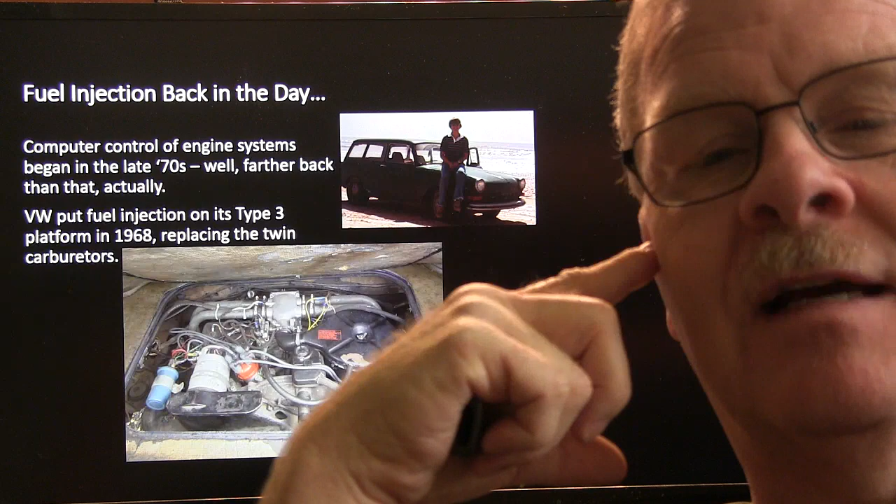This was a car I owned back in the late 70s, a little Type 3 Volkswagen Squareback. You might have seen those - they also had a fastback version. The Type 1 was the Bug, the Type 2 was the Bus, and the Type 3 was this one.

Then they had the Type 4, which was the 411 and 412. Those were interesting cars because they had a gasoline heater you could turn on before even starting the car, and it would run on a timer for about 45 minutes using gas from the tank to heat the inside of the car.

One way or another, fuel injection first came out on these cars in 1968. Prior to that, they had two carburetors on them.

I used to watch my dad work on these cars at his VW shop. He would adjust both carburetors at the same time using thumb wheels while listening to them. He'd take a piece of foil hose, like what goes from the stove up to the air cleaner on older trucks - it had a thermostatic air cleaner - and he'd listen, because Volkswagen used that airflow from the blower housing down through the heat exchangers for the heater and all.

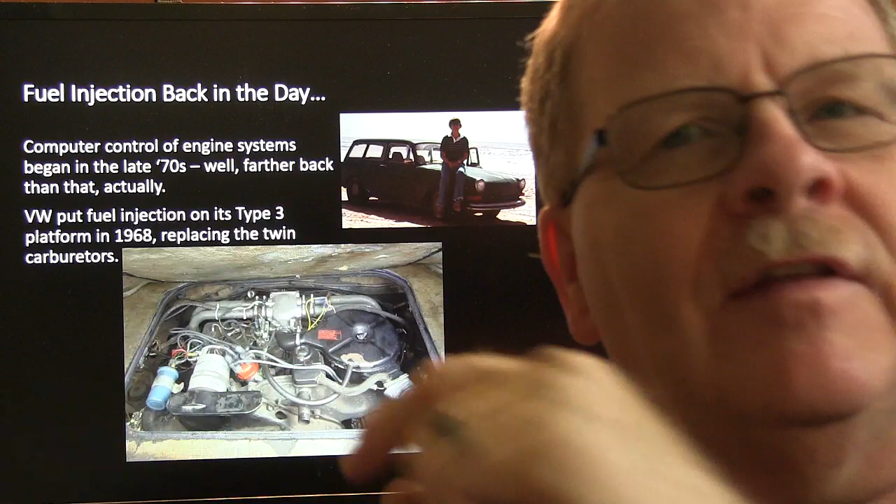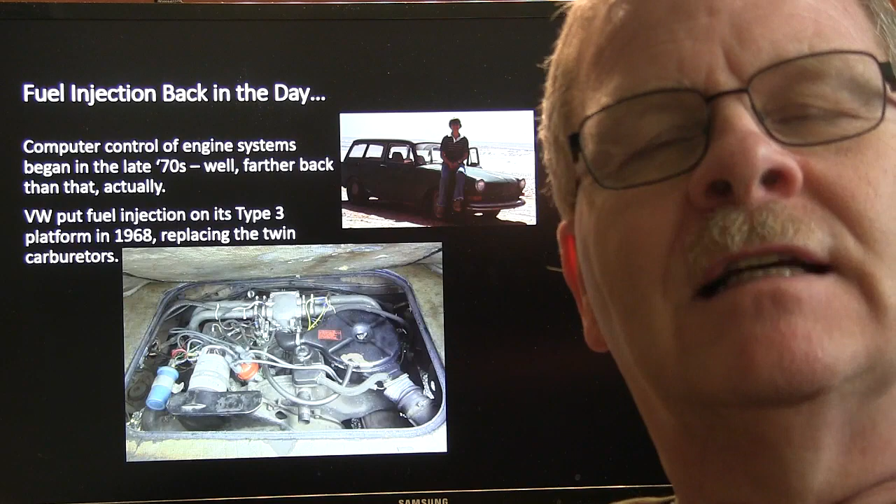He'd listen to one carburetor and then the other. I never really knew what he was listening for, but he'd fool with them until they sounded the way he wanted, and they'd run really smooth. Well, this fuel injection that Volkswagen popped on these things in 1968 was a different critter.

Incidentally, in the schools they used to say that these old engine controllers Bosch was using to start with - you could buy any part you needed to fix that engine controller from Radio Shack at the time. Everything in it was available from Radio Shack. I don't know how true that was, but that's what they always said.

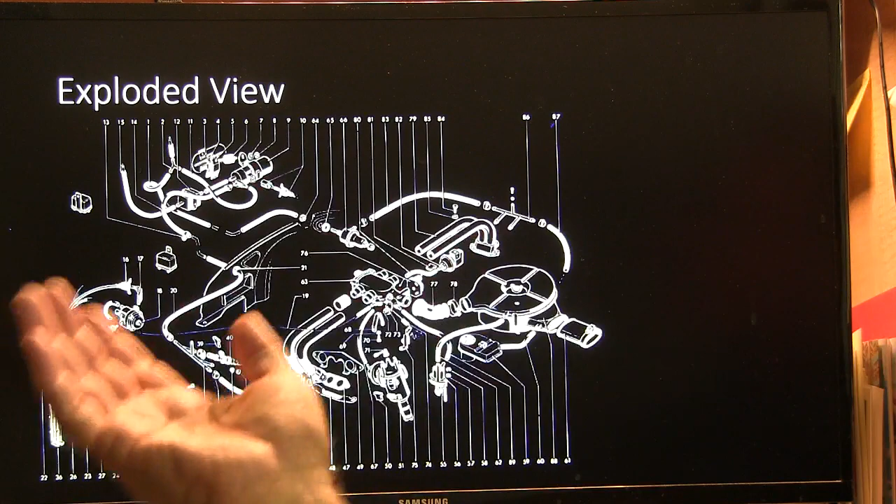And basically, you had this. This gives you - if you're familiar with Volkswagen air-cooled engines, you'll be familiar with this because of the way it was set up. It comes in, it's dual port heads and all that, and so on and so forth. I don't need to look at that slide anymore.

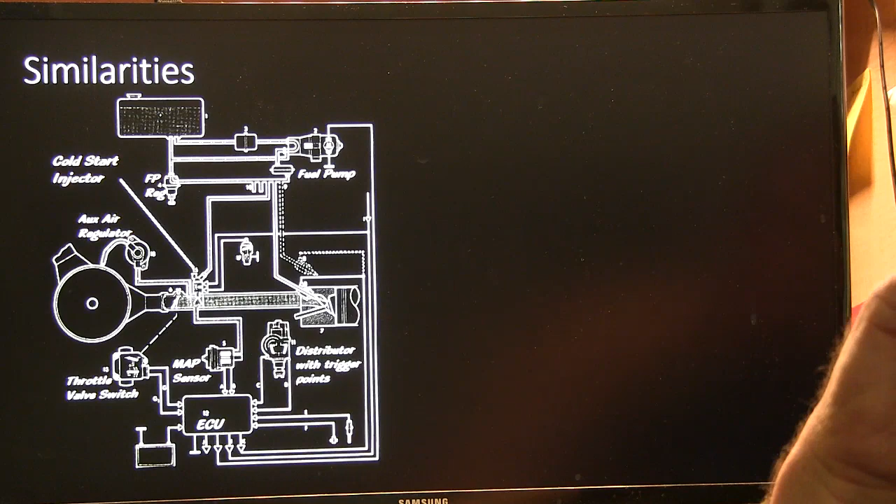The similarities between this and the stuff you've got now are pretty interesting. You've got an auxiliary air regulator - think idle air control valve. You'll notice that's pulling filtered air and putting it right in behind the throttle plate, right? That enables the auxiliary air regulator. When you first started it, it had a little bimetal strip in it, and that bimetal strip would get power when you first started it.

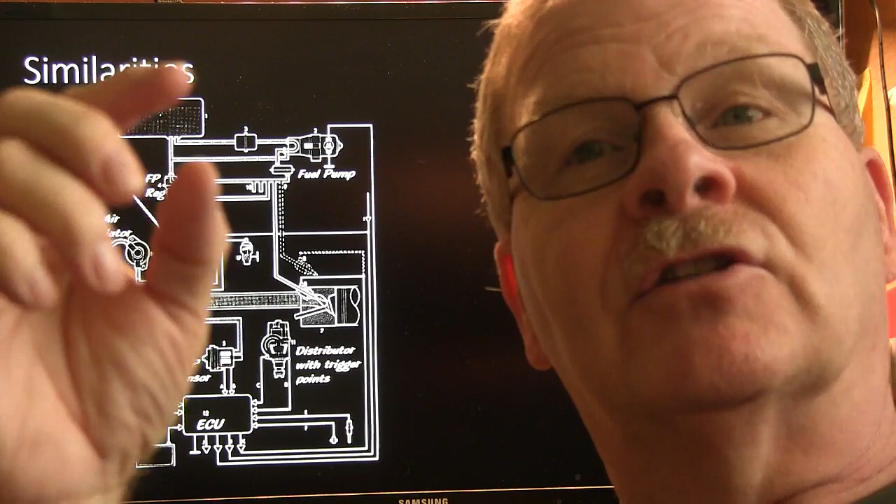And the bimetal strip, to start with, was letting air go through that auxiliary air regulator, but as that bimetal strip warmed up with its calibrated heat, it would close off a little pintle and stop that air. So it gave you your fast idle, right?

Okay, so then basically you got your fuel pressure regulator right here, and you got your fuel filter, and you got your fuel pump. As I remember, that was an adjustable fuel pressure regulator. And then you got a cold start injector.

You remember I've talked a few times on these videos about how for your cold starts you need to double pulse the injectors, or you have to have a cold start injector that'll put extra fuel in there to wet the manifold, because on a fuel injected engine you don't have an accelerator pump like you do on a carburetor.

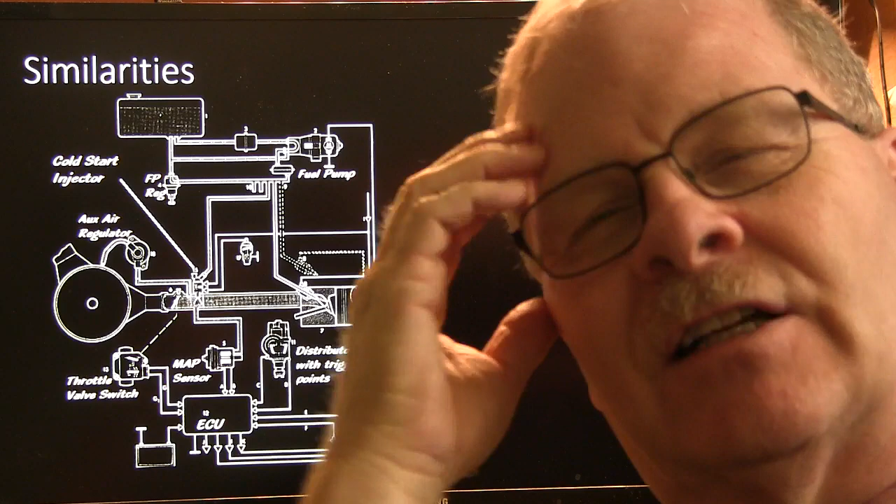There's your ECU. The trigger points on that would basically give the ECU what it needed for engine speed, so that it could click, click, click, click the injector. You could hear these injectors clicking. They were pretty loud when these things were running.

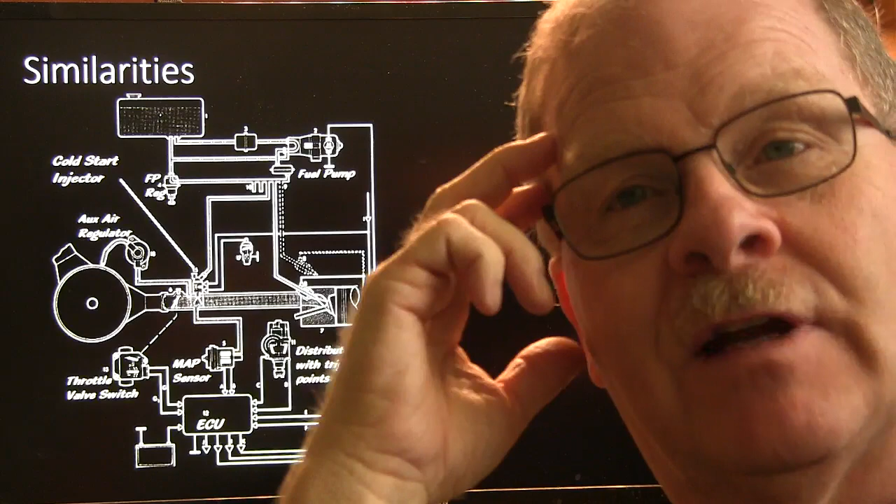And there was 40 pounds of fuel pressure, and those hoses that they used to feed the fuel pressure to the injectors were those old cloth-covered rubber hoses like the Germans like to use on the older Volkswagens. It's real interesting. And those things had a tendency, whenever they got some miles on them and got old, to start busting, spraying fuel everywhere, or start leaking.

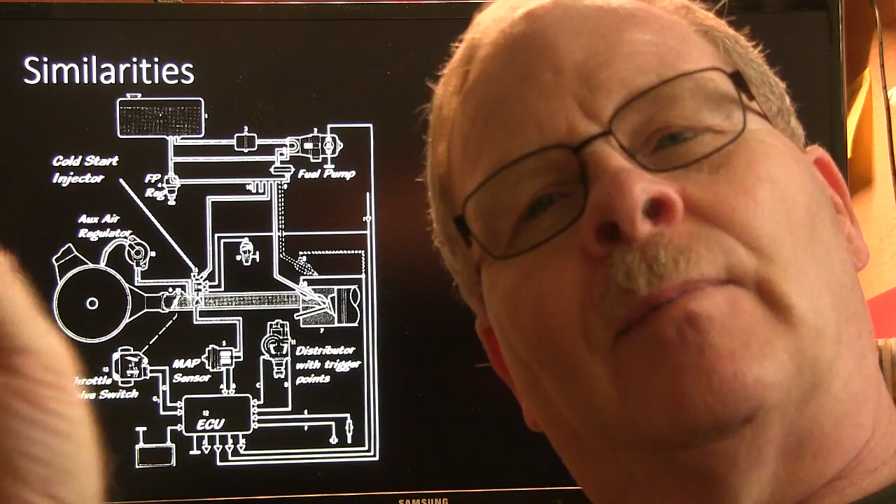But anyway, the temperature sensor and the throttle switch and all that, and your MAP sensor basically is what this was. They called it something else, but that's basically what it was. It was a MAP sensor, an input to the computer along with this, and what it would do is it knew how to expand the pulse width just the right amount based on the engine load.

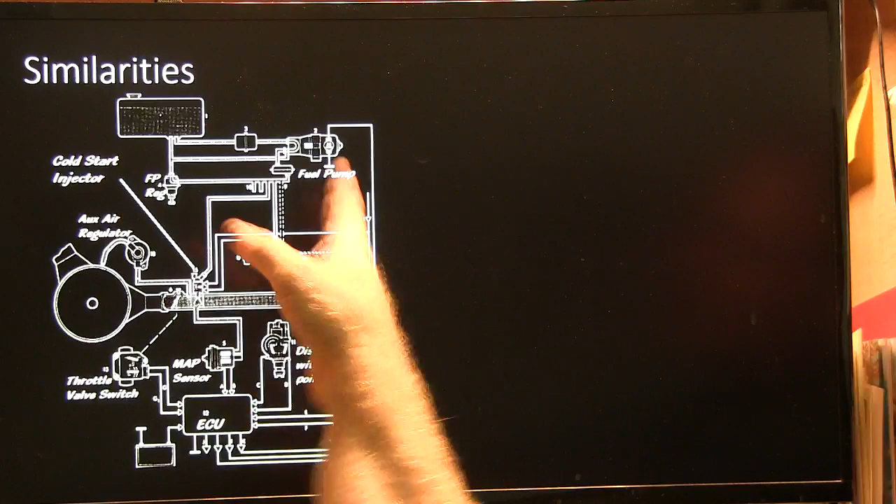And it was a sort of a funky thing that they did. Didn't have any feedback at all. You basically just had to have the fuel pressure right, and this thing had to be operating correctly, so it was giving the right information about manifold vacuum and that. And that was pretty much their answer to fuel injection. It came out there early.

All right, so change in electronics, the rise of the Vane airflow sensor. The Vane airflow sensor was basically a little air box that had a flapper in it. Whenever the air would come through that flapper would move, and it was connected to a set of points that would slide on this potentiometer.

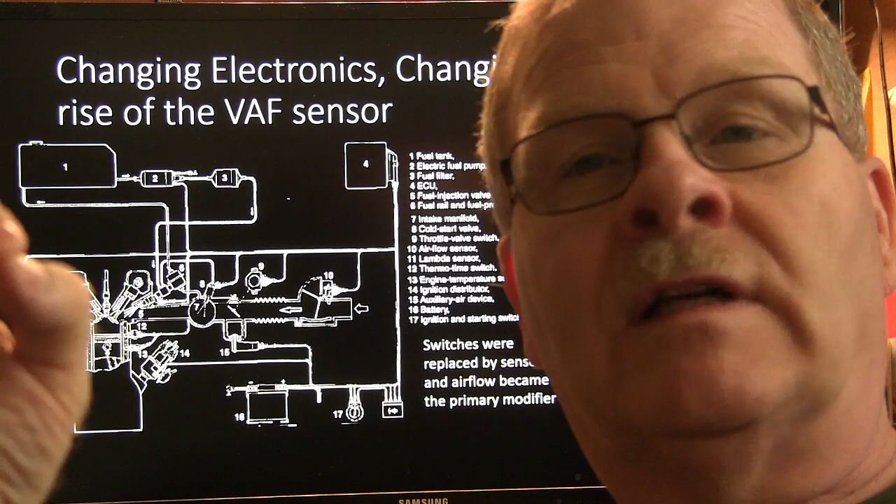And there was also a little set of points in most of these Vane airflow meters that until that Vane airflow meter started to move, the fuel pump wouldn't get any power at all. When you started spinning it over, that Vane airflow meter had a real weak spring holding that flapper, but it would start to move a little bit, and it would close some points that would operate the fuel pump.

If you ever unplug a Vane airflow meter that's set up that way, and you want to start the car with the Vane airflow meter disconnected, you got to jumper the little terminals that are going to the fuel pump. It basically goes through the Vane airflow meter. You got to jumper those so the fuel pump will run, so you can fire it up without the Vane airflow meter connected. If you disconnect it, you won't get any power to the pump.

And these things right here, some of your really early Ford Escort fuel injected engines, like in '83, they had a Vane airflow system. Volkswagens like to use that. Toyota used it all the way up into the '80s, like their MR2 and stuff like that.

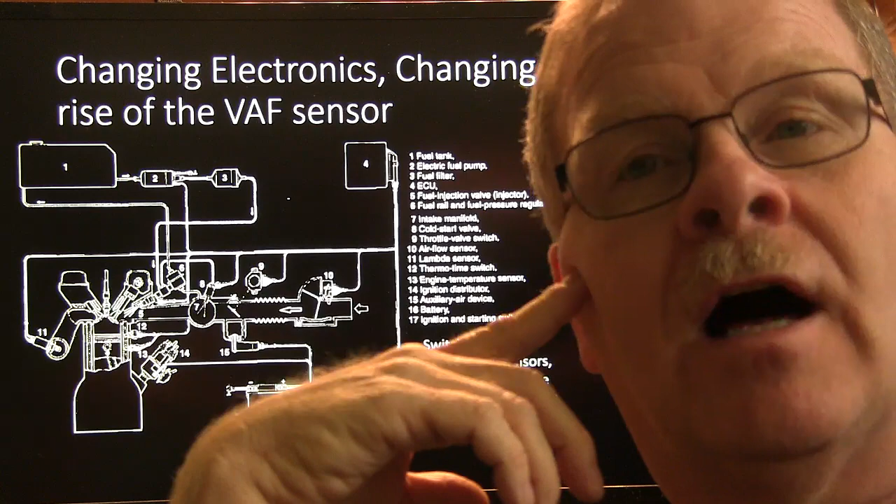I priced a Vane airflow meter one time for an MR2 when I was thinking, according to the readings I was getting from that MR2, going by Toyota's book, it looked like the Vane airflow sensor was a problem. But whenever I priced it out and found out it was $800, I decided I needed to look somewhere else before I went and ordered that darn thing. And I found the problem somewhere else, but that's another story.

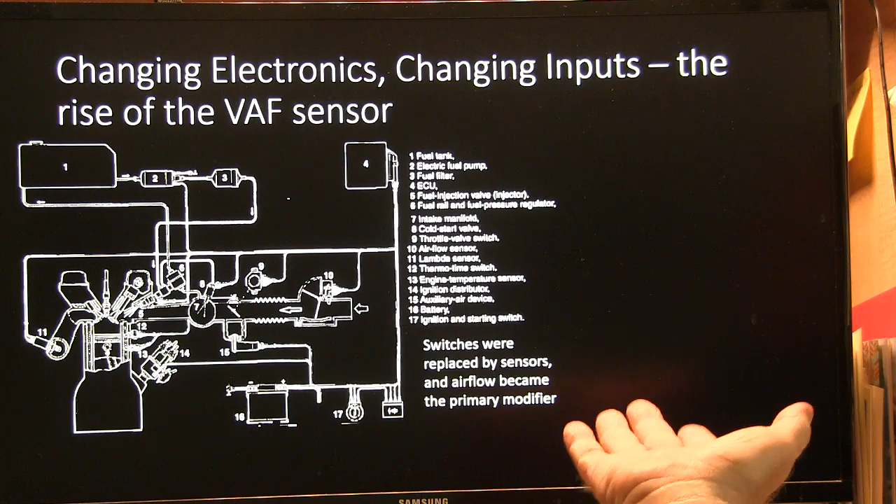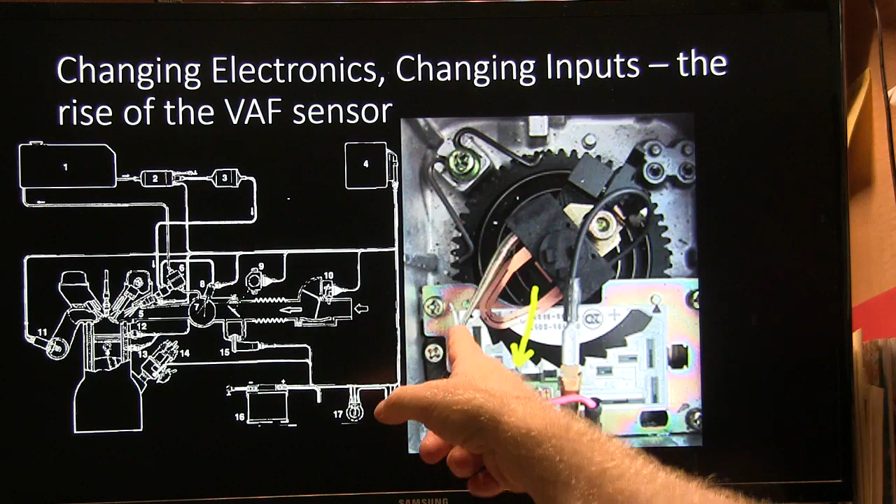This one had a scorched spot, but in spite of that, I made the car run right without replacing it. One way or another, that little set of points is what gives you your fuel pump whenever that flapper starts to move.

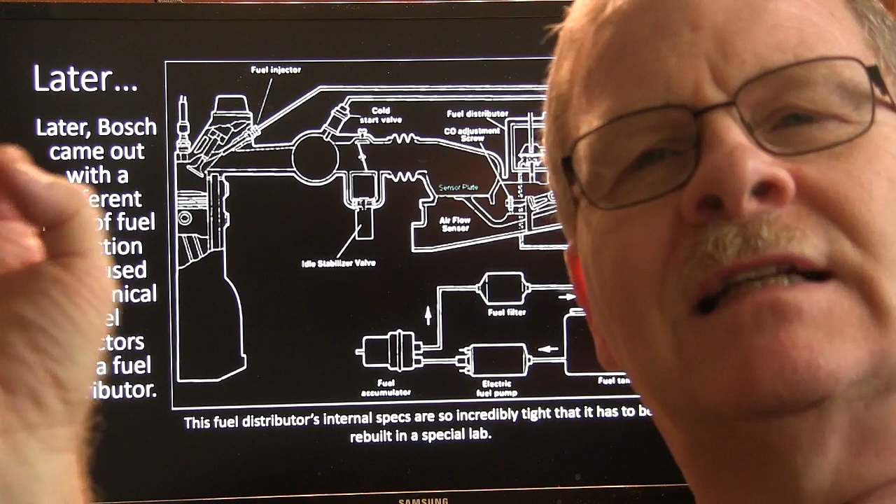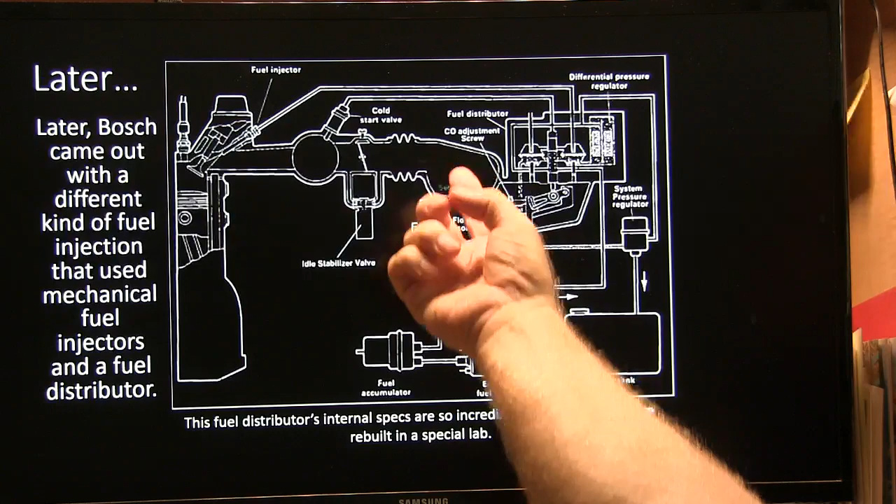Later, Bosch came out with a different kind of fuel injection that some of you are probably familiar with—the same kind used on the DeLorean. If you've ever worked on a DeLorean, you've seen Bosch K-Jetronic fuel injection. They also used it on Volkswagen Rabbits for years. They had these little atomizers with fat O-rings that you'd snap into place, spraying behind the intake valve. As airflow came in, it would push against a plate, raising it, which in turn raised up the fuel distributor.

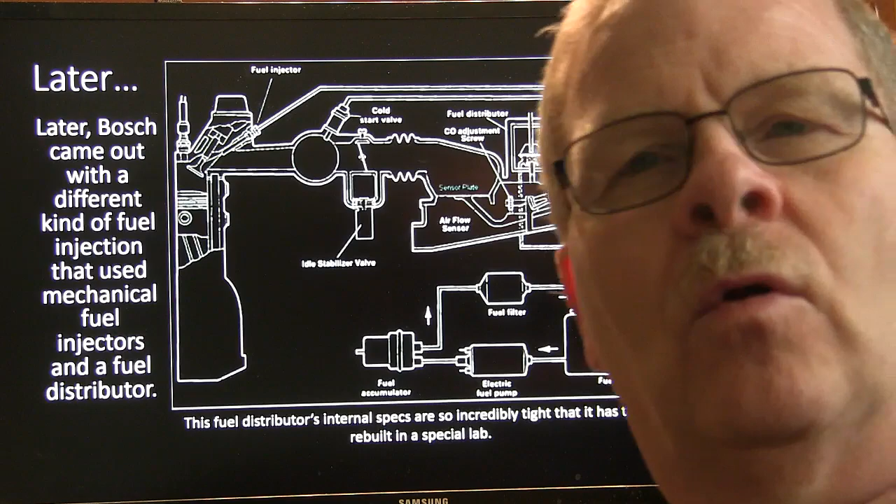They also had a cold start valve. The deal was, there's a pressure regulator that, when the engine was cold, would reduce the pressure on top of the piston so it could raise up farther and provide more fuel. As it warmed up, the pressure would increase and push the piston back down. That's an important thing—I'll talk more about how they used that for other purposes later.

Of course you had an electric pump, an accumulator, and a fuel filter. It's an interesting system—there's your system pressure regulator, see how funky that was. They called this an idle stabilizer valve. They did all kinds of stuff. There's those little atomizers that pop in there, and that's what the fuel distributor looked like.

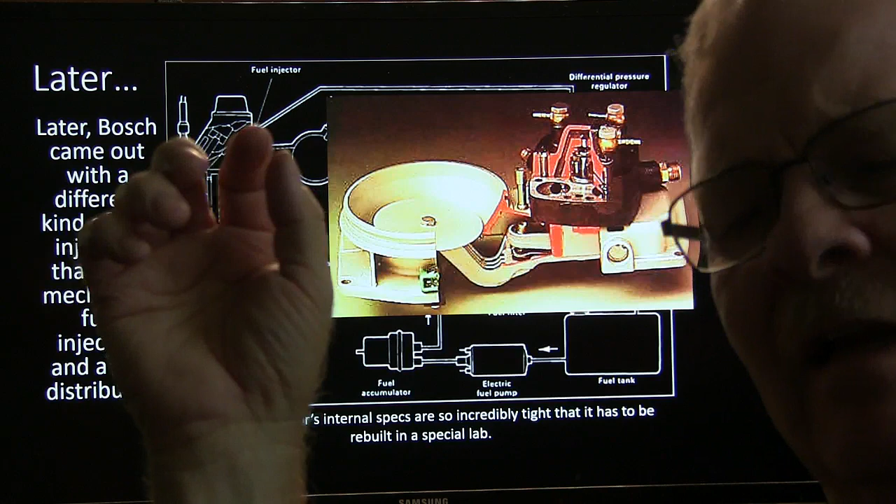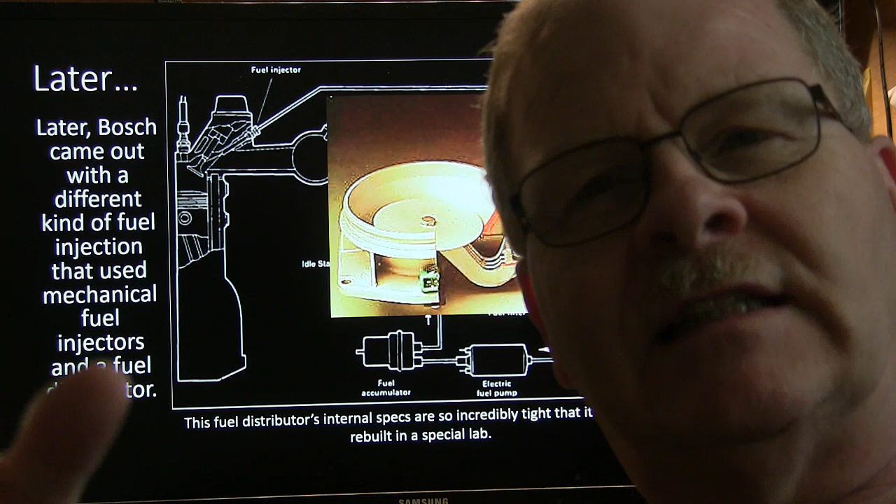There was a little adjustment screw here that we'd go into with an Allen wrench—I think it was an 1/8 inch of all sizes, though I may be wrong about that. We'd hook up an exhaust gas analyzer to a port on the exhaust and turn that screw until we got the CO at 1%. That was back in the 70s and early 80s.

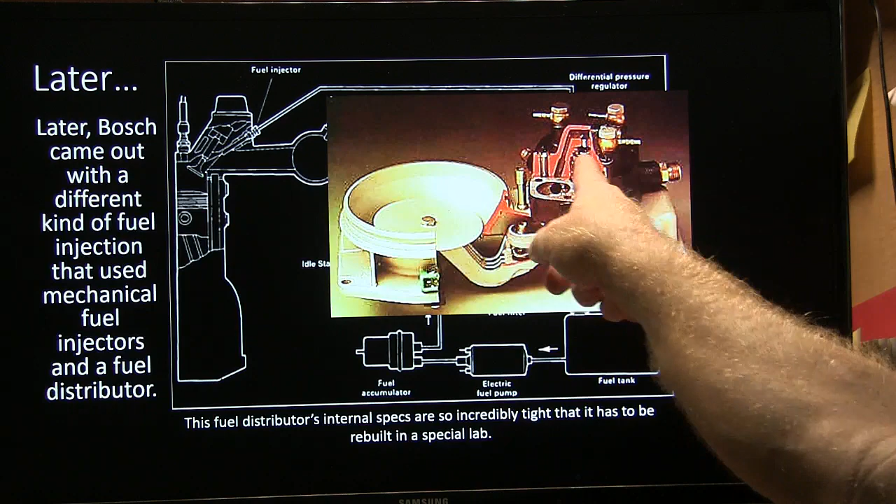But basically, that's how it worked, and it had really high fuel pressure—might have been 80, 90 pounds. The pressure coming in the top, in the middle, put downward pressure on that piston. You can actually get all of this stuff in a package, if you know where to buy it, to replace the fuel pump and fuel distributor.

If you ever take one of those fuel distributors apart, you'll never get it back together again where it works right or doesn't leak, I'm telling you. Those little slots that the four fuel distributor pistons go past to let fuel through must have been cut with lasers or something. I don't know how you can make a slit that thin otherwise.

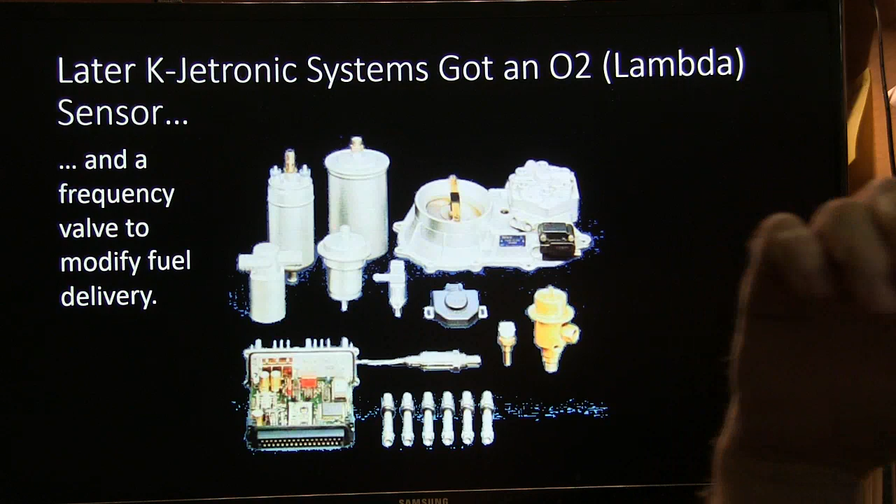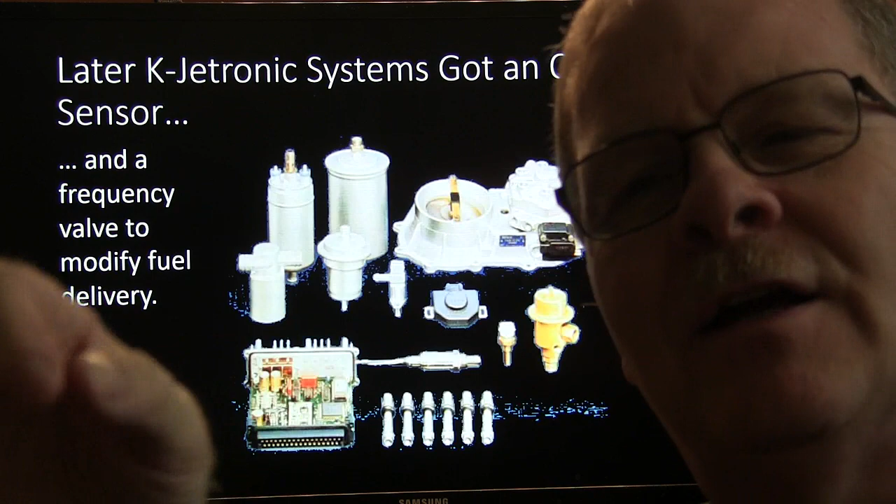Anyway, there's your fuel pressure regulator, and there's a little temperature sensor. This is an oxygen sensor right here. And there's a frequency valve hooked up in the line between the warm-up regulator and the pressure on top—that frequency valve could actually change that pressure. If it was working right, you'd read it and it would show like 50%, adjusted properly so the oxygen sensor was switching above and below.

You might remember on your feedback carburetors how on GM you'd put the dwell meter on there and look for it to be bouncing back and forth between, whatever it was, 15 and 45—I don't remember those numbers exactly. I went to school on that and could dig the book up to give you the information, but who needs that anymore, you know.

But the long and short of it, with these little atomizers, there's nothing special about them. Basically, when fuel pressure hit them, they just misted it out there, and they misted all the time. Whenever that plate was raised up, it would increase the mist. There's your little controller and all.

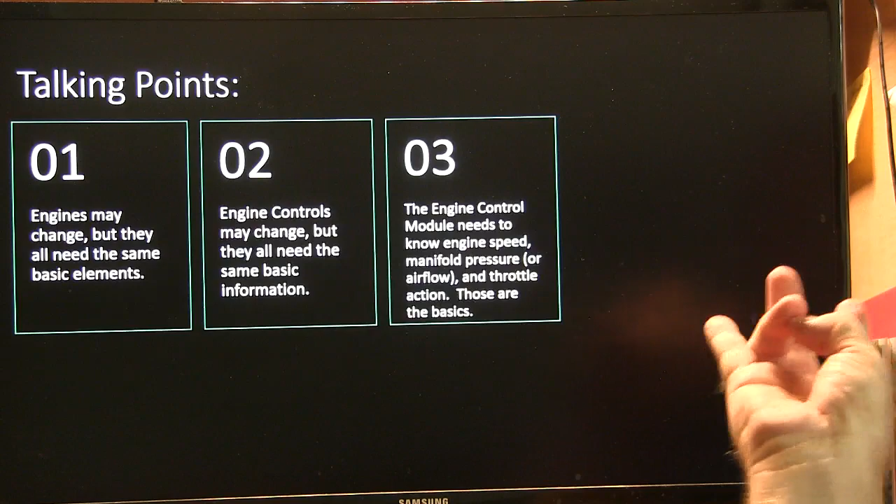It's kind of an interesting talking point. Engines may change, but they all need the same element. Engine controls may change, but they all need the same basic information. The engine control module needs to know engine speed, manifold pressure or airflow, and throttle action. Those are the basics—your basic principles don't change. You need a fuel charge on cold start.

Older systems use the cold start injector, I showed you that a minute ago. Newer systems simply double pulse the injectors during crank, and a lot of times they'll fire them all at the same time in addition to double pulsing them, instead of firing them along by the firing order. The injector pulses must match the speed of the engine after it starts, except for those extra little shots between pulses that happen with throttle movement, which mimics the operation of an accelerator pump.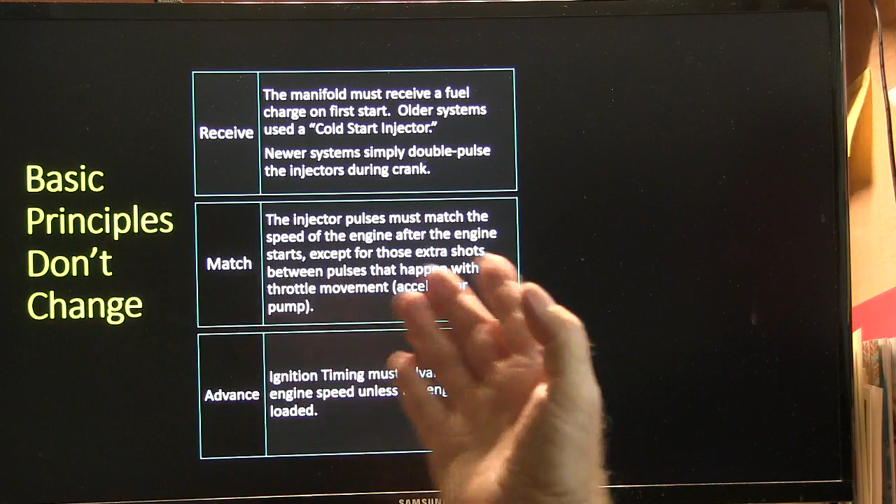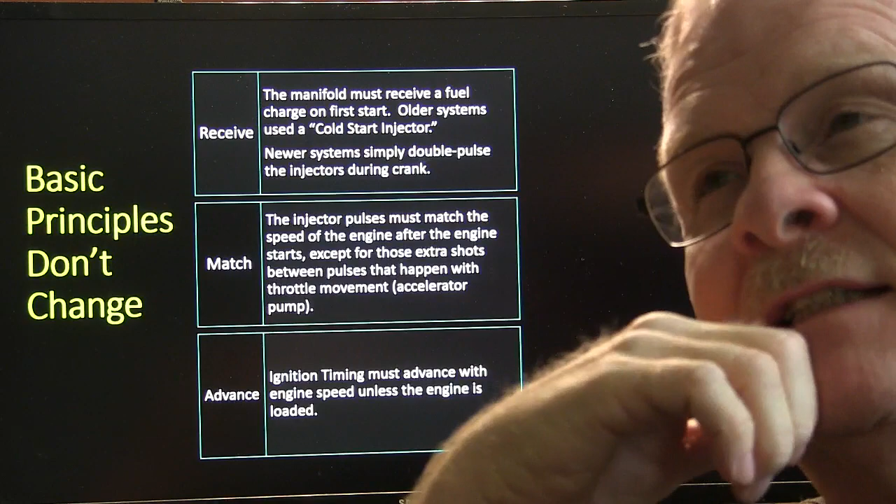Ignition timing must advance with engine speed unless the engine is loaded. If the engine is loaded, the timing will go back close to base so it doesn't ping. But if you're just giving it the gas and it's floating, like on this other question on the test I put out there last time, if you're driving down the road holding your speed at like 50 miles an hour, you're going to have the ignition timing up around 45, 55 degrees, something like that. That's why it's important to have the rotor line proper.

Now, fuel supply's got to be more than adequate. There's got to be more fuel than it needs coming to that thing. So if it's running low on fuel because the pump is weak or whatever, you're going to have some power loss, and that's never a good thing. On this diagram here, you've got your fuel filter, and then there's your return flow.

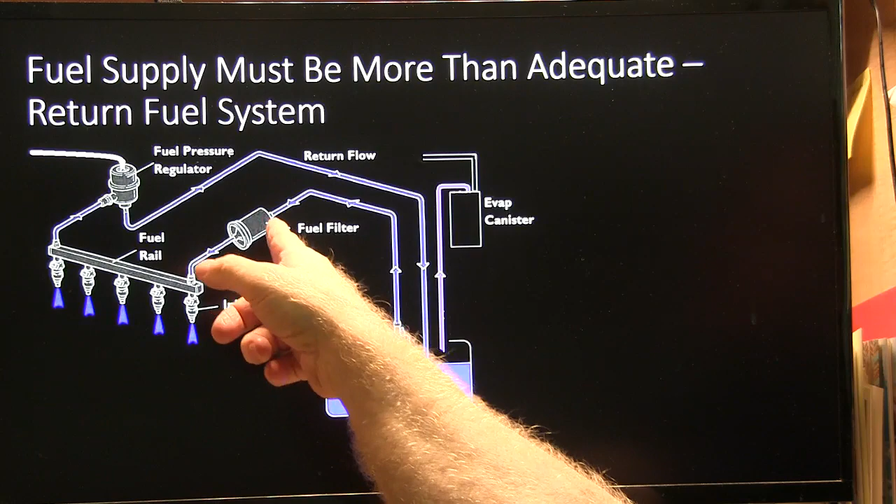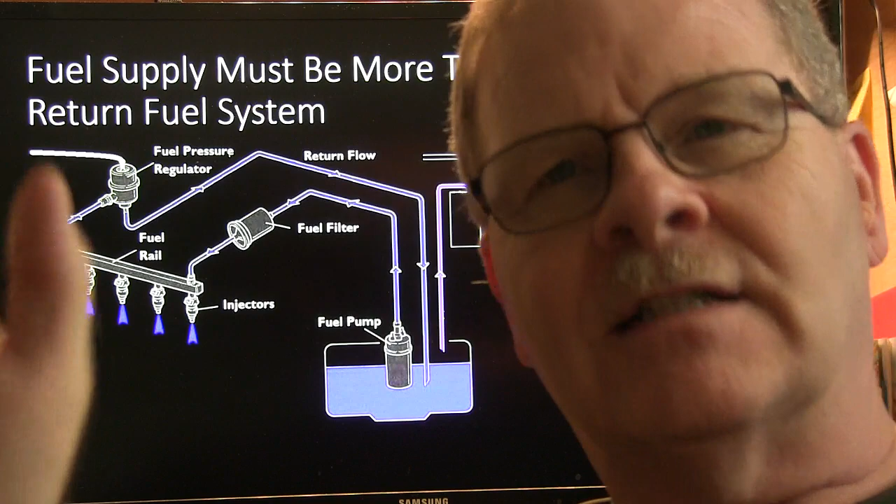Now, I don't talk a lot about diesels here, but on those diesels, one of the things they discovered, and Volkswagen had problems with it too, is if you run that return back in a diesel so it's spraying out above the fuel in the tank in a mist, that stuff will get oxidized and turn into tar. You might have seen that tar that clogs up some of the fuel screens. On later models, when they finally figured that out, they would run the return all the way to the bottom of the tank, and run it out through a little duckbill thing so it sprayed out underneath the fuel and didn't mist out into the air above it and turn into tar. That's for diesel now, not a gas burner.

There was this Cadillac, and I don't remember if I ever told this story here or not, but a lady came in on her Cadillac and said, I've got a traction control light on my Escalade. At the time we weren't doing any of that kind of work, brakes or electronics or anything, so I said go ahead and take it over to Randy at the Cadillac store in Dothan and see what he says, maybe a reflash or something like that. I didn't even get into it, we just pulled a code for traction control. So she took this '07 Cadillac Escalade over to the Cadillac dealer, and she came back and told me the dealer said I needed a fuel pump for this traction control problem. I said, what in the world were they talking about? She said they said the fuel pressure was too high and they needed to replace the fuel pump, and until they did that they couldn't do anything else. But they wanted $1,800 to put a fuel pump on it. I said, well, let's see what we can do here.

I checked the fuel pressure, and it was 160 pounds. The regulator that was built onto the pump inside the tank had failed, and it was letting the pressure just go. But the vehicle ran just fine. All she had was a network code, as I remember, and a traction control light. So we got a $450 fuel pump from the parts store, popped that in there, and the fuel pressure came back down to where it was supposed to be, maybe 60 pounds or something like that. After that, her traction control light and network code were gone. Now, I don't know what the exact deal was there, but I do know the dealer knew what they were talking about because they'd seen it before. If you've got a failed fuel pump with too high fuel pressure, it throws the network code and traction control light.

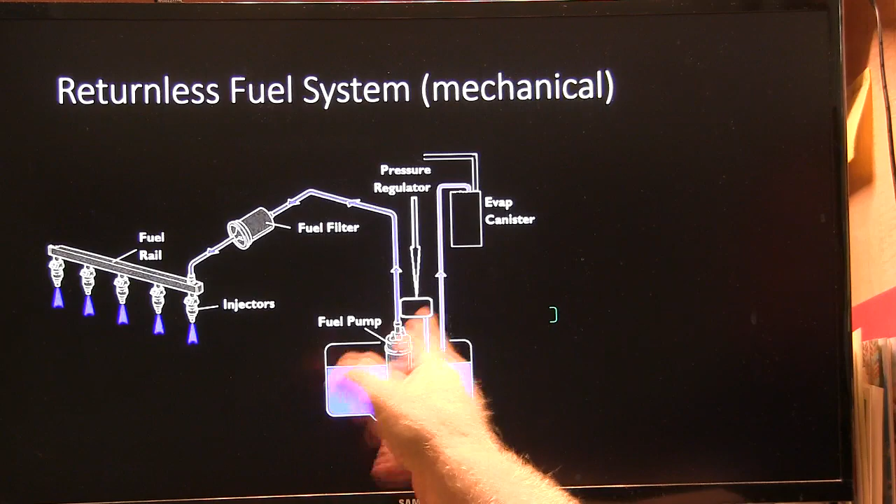Now, there is another way of doing that too. You can actually use a sensor on the fuel rail. You can use the PCM. You can use a module, and that module will change the amperage going to the fuel pump.

There's this one guy I knew about that had a Mustang that was running really, really rich, and the fuel pressure was all screwed up. He found out that inside the fuel tank somebody had put a fuel pump in it, and the wire that delivers the ground from the module of the fuel pump had shorted to the bracket on the pump or something, and it was giving full power to the pump all the time, and the pressure was completely off the charts.

I have talked about whenever you're going to check and see if the fuel pump has got good continuity all the way through, you can put a test light in there and see if it lights up. You can't do that when you got a fuel pump module unless you do it right back there at the module.

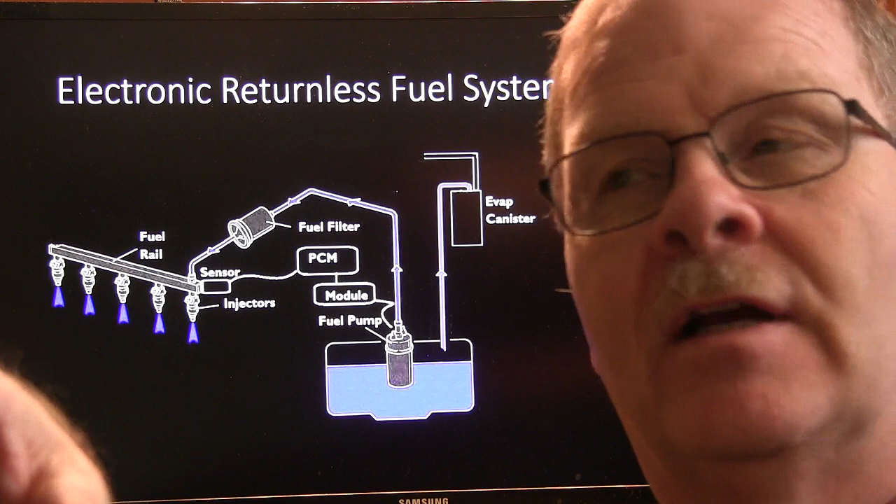Also, there are these three-phase DC electric fuel pumps that some vehicles are using now. They're DC fuel pumps, but they basically got some electronic circuitry driving them, and it's like the motors that drive the transaxle on the hybrid vehicles are three-phase AC, while the three-phase DC motors are also used in electric power steering. But they've started having some fuel pumps that are three-phase DC as well. So be aware of that. They're not all plain old DC brushed fuel pumps.

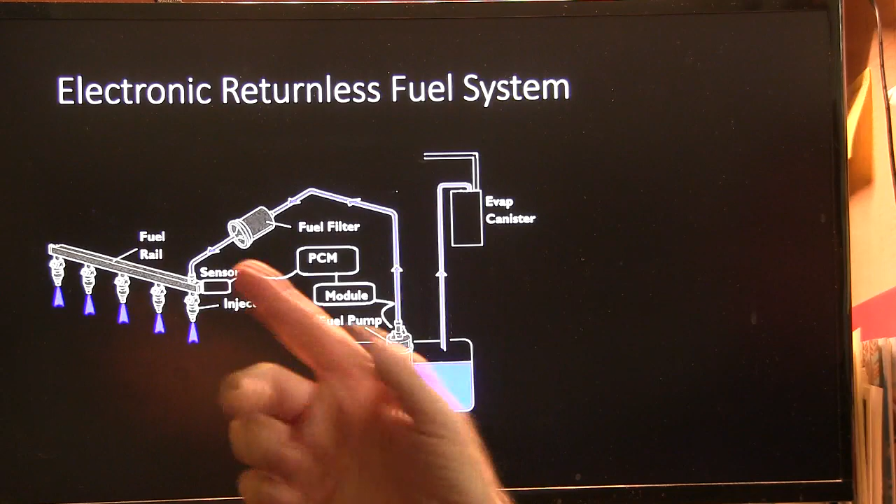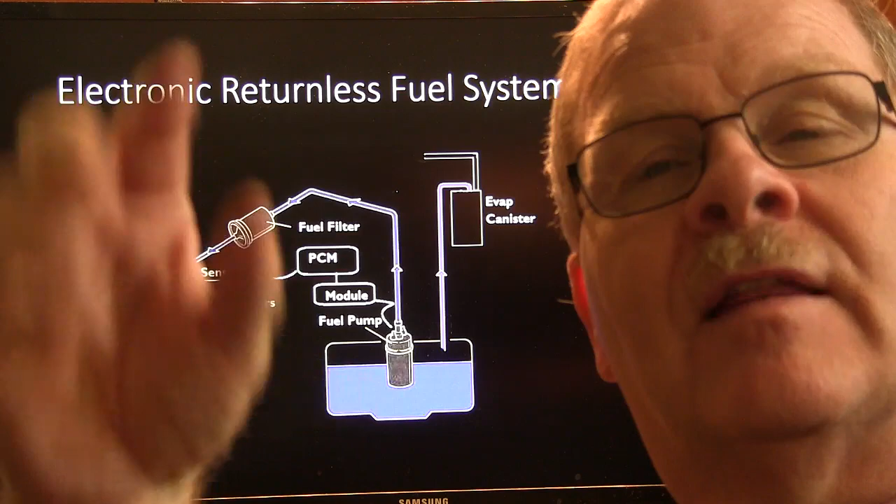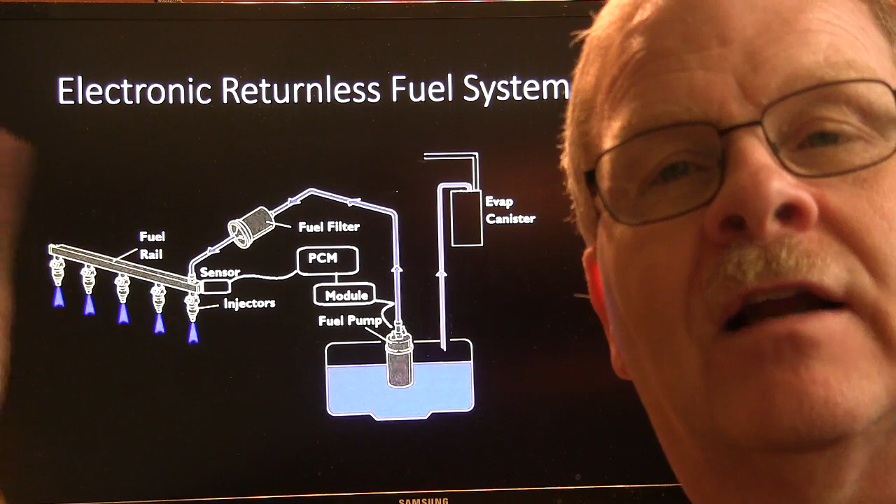Brushless pumps are three-phase DC. On a brushless electric motor, you know how on a regular permanent magnet motor, the magnets are around the outside and the part in the middle is fed by the brushes, and that causes your magnetic field to make the motor spin. Well, on a brushless motor, the magnets are built onto the spinning part, and the windings around the outside are delivered with pulses from the electronics, and there's little feedback mechanisms and all that, depending on who built the motor and how it's built. Anyway, the motor runs without brushes entirely, and it's usually a slightly better setup because brushes tend to wear out and stuff like that.

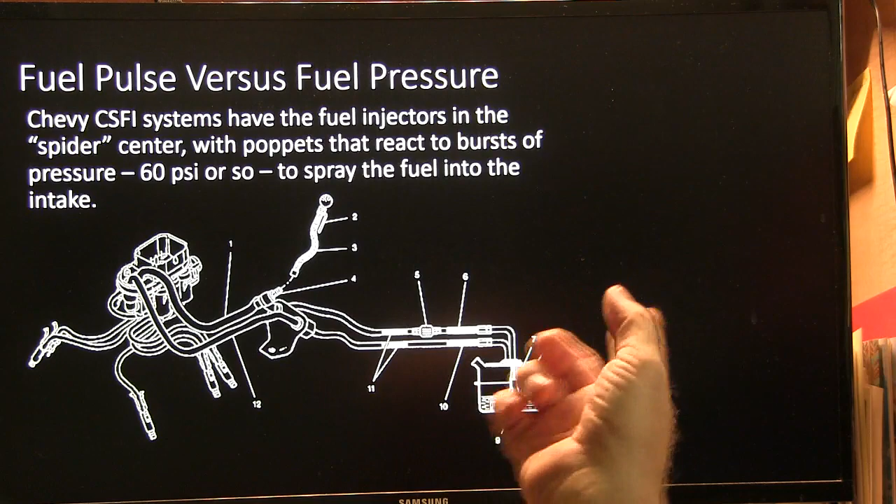Now, Chevy CSFI systems have the fuel injectors in the spider center with poppets that react to bursts of pressure, 60 psi or so, to spray the fuel in the intake. Those poppets will not operate on some of those.

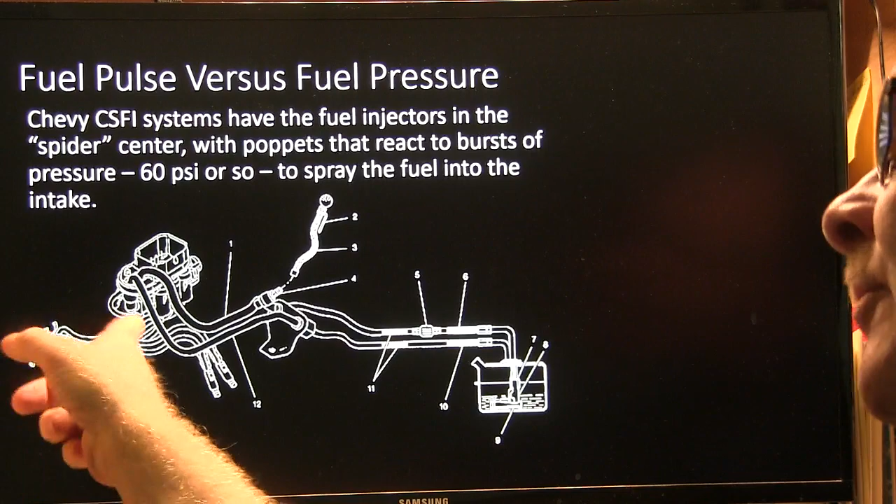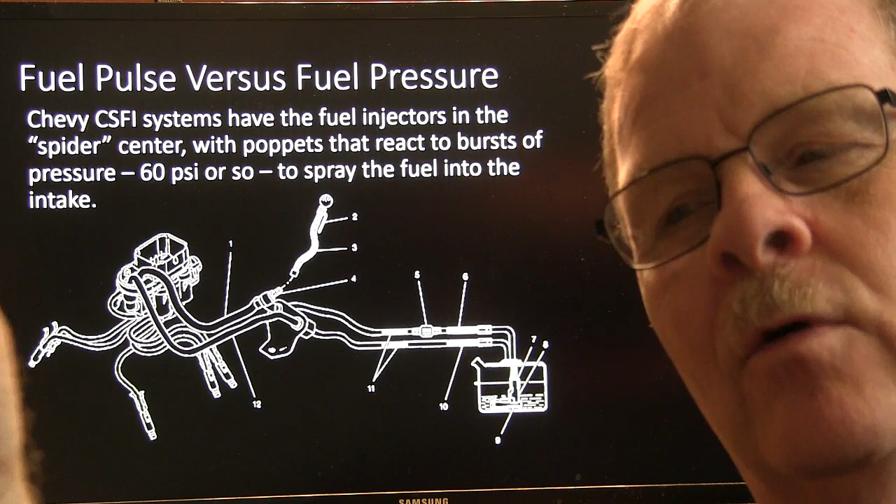It's a little bit of a fruit basket turnover because of product variability, but if you've got the plain old poppets, they got a little solenoid in there that lets little bursts of pressure go to those poppets. If the pressure is not high enough, you may have 55 pounds of fuel pressure and that vehicle still won't start because the poppets won't operate without enough pressure. You need to make sure if you've got a CSFI that won't start, if you don't have at least 60 pounds of fuel pressure, you better be doing something about that.

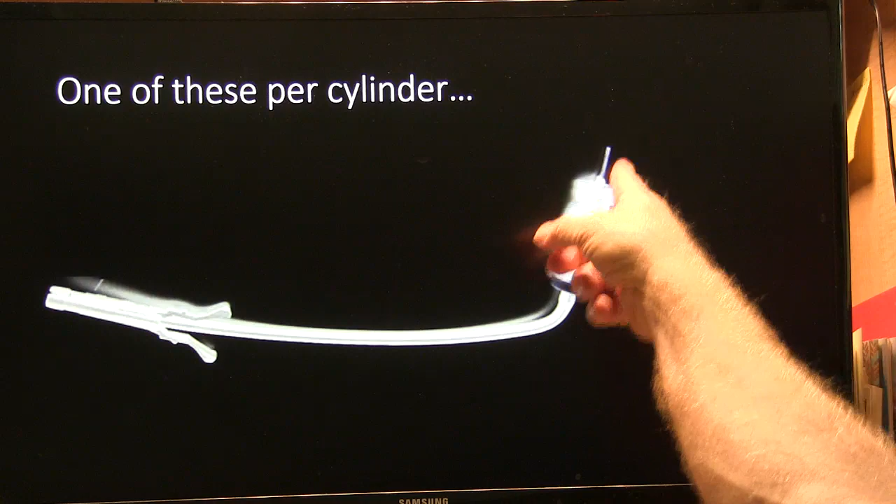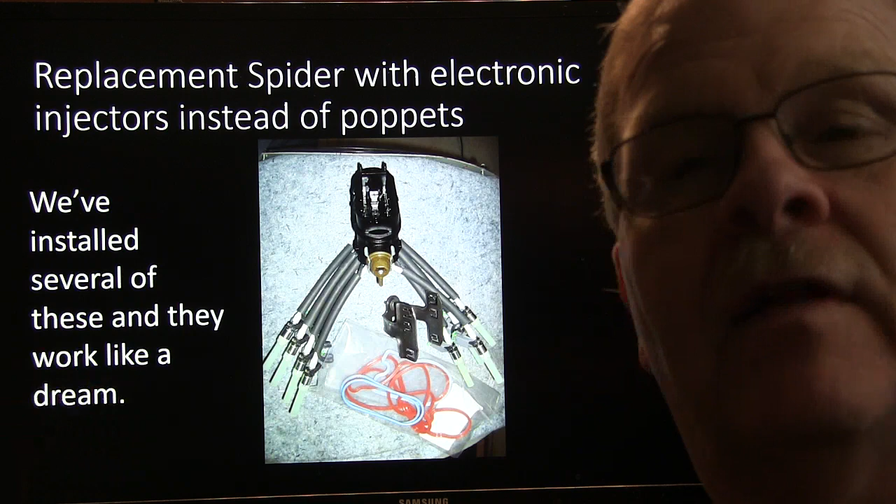This right here is where your EGR comes in, by the way. The replacement spider with electronic injectors instead of poppets is what I put on my dad's pickup truck. They sell these at the Chevrolet place and at the parts store for $300 or $400. But if you've got one of these vehicles, when you put that on there and put it back together, you can't tell it's not factory, and it works better since it's not as pressure sensitive as the older ones were.

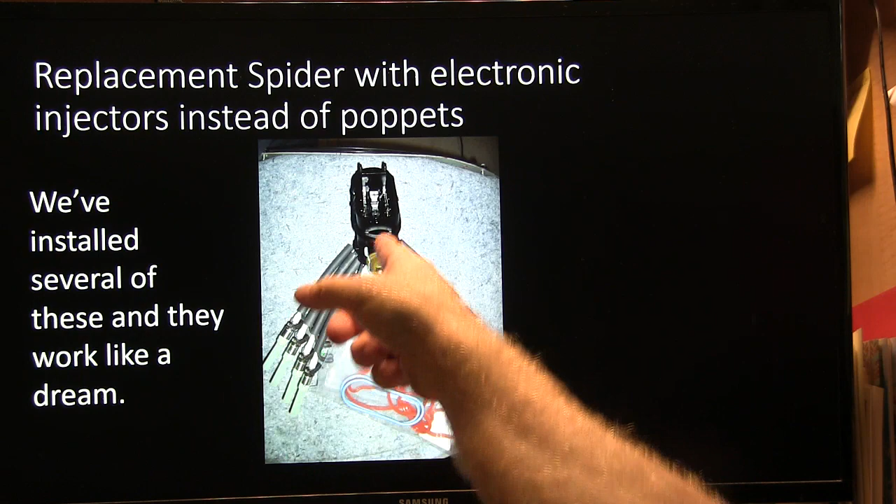I like this setup here. Your fuel pressure regulator is set up the same way, and the injectors basically have their little solenoids right there on the injector instead of being up top delivering bursts of fuel pressure. They work like a dream. We put several of them on.

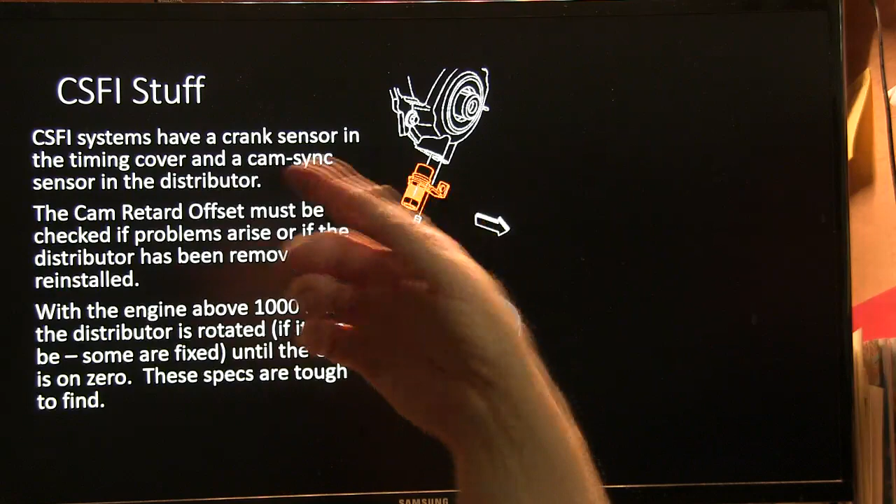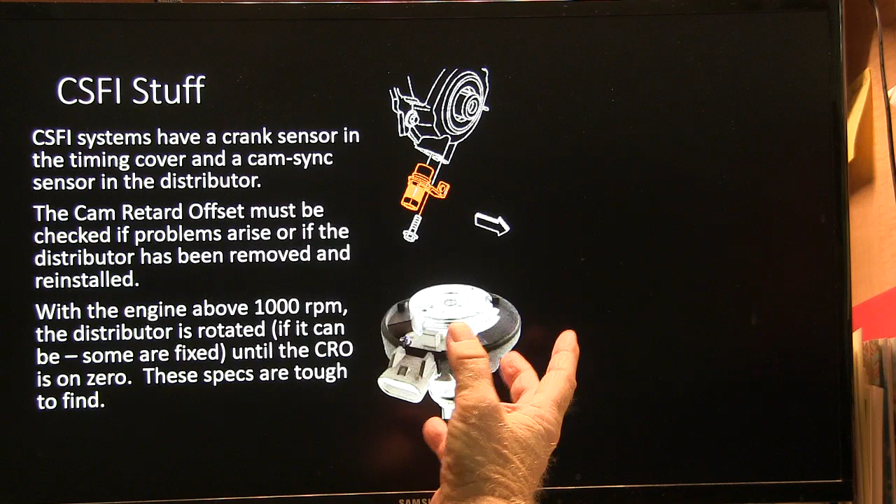Alright, CSFI stuff has a crank sensor in the timing cover and a cam sync sensor in the distributor. The cam retard offset has to be checked if problems arise or if the distributor's been removed and reinstalled. With the engine above 1,000 RPM, the distributor is rotated if it can be. Some are fixed until the CRO is on 0. Cam retard offset's got to be on 0 - that's most of the time where those are set.

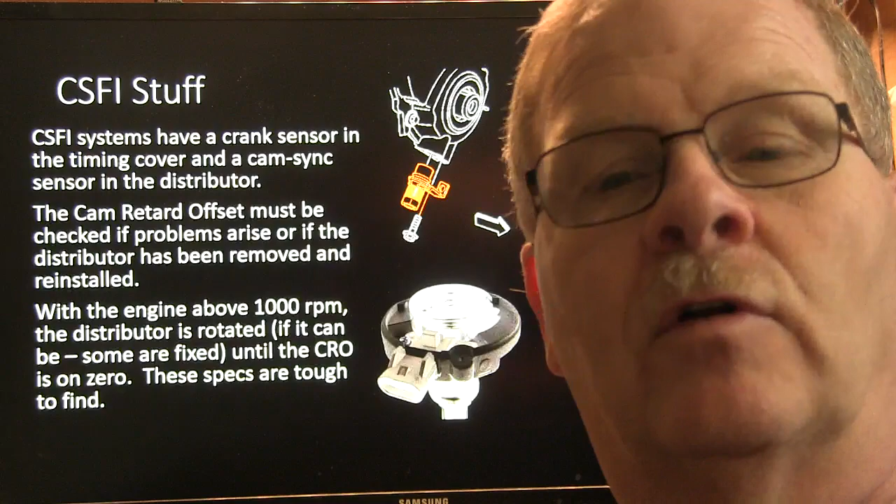A lot of the times, if you've got one of these engines running really crappy, I usually just throw a distributor in it anyway because it's got a new sensor. But when you put that new distributor in there, you better set that cam retard offset, because if it's off enough, it will bank fire the injectors and your fuel economy will go to the toilet. If it was getting good fuel economy before and you pull that distributor out and put it back in, even if it was running fine and you're just fixing an oil leak, if you don't set that cam retard offset, you're going to have fuel economy issues with those CSFI Chevy deals.

Because you don't want it bank firing the injectors when it's supposed to be firing them sequentially, and that's what it'll do if it can't trust this signal. Now, I will tell you that cam retard offset signal makes its cut at 24 degrees after top dead center, because that's when all the fire has gone out in the cylinder after the spark plug fires. The Ford makes its cut at 24 degrees after top dead center too, just like this one does. That's a magic number apparently on these gasoline engines.

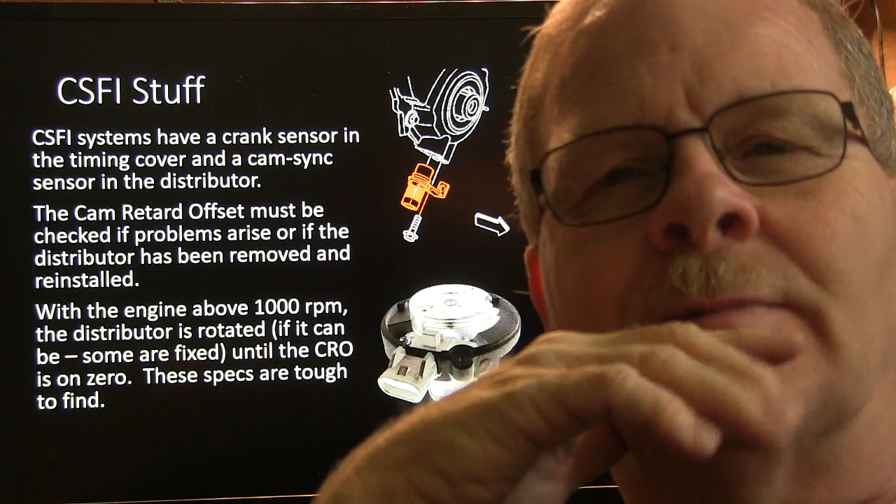Whenever the explosion happens, it's just slapping the head of the piston. On your diesel, because of the way it fires and burns slower, it's pushing the piston all the way down. That's why diesels have got such good torque.

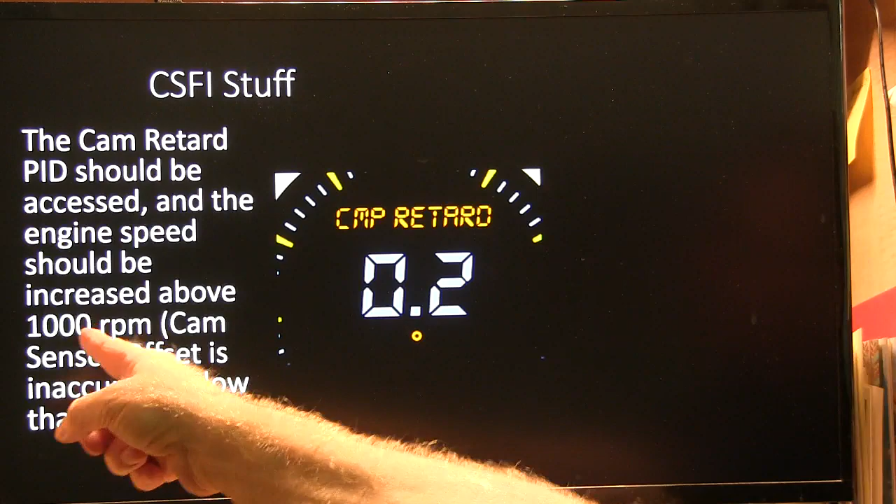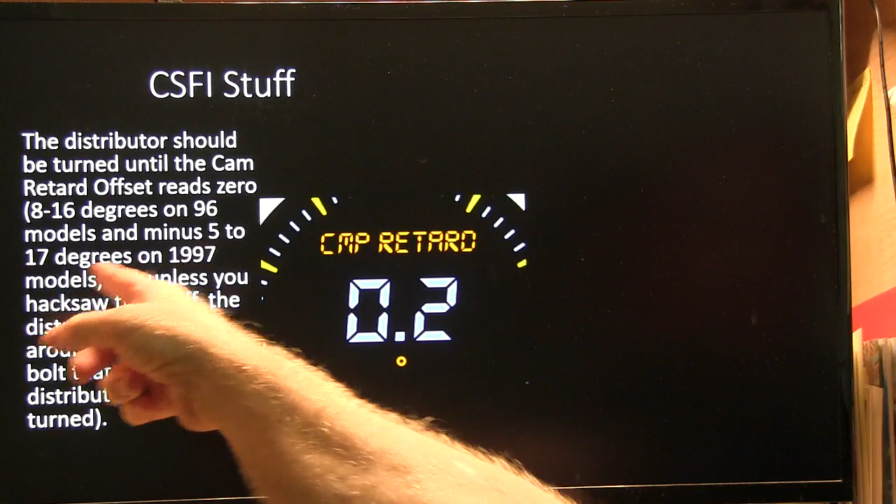Alright, the cam retard PID should be accessed. The engine speed should be above 1,000 RPM when you're setting the cam retard offset, because it's inaccurate below 1,000 RPM. That ought to be turned until the cam retard offset reads 0. On some 96 models, it'll be 8 to 16 degrees, and minus 5 to 17 on 97 models, but typically 0 is the number I've used on most of the ones I've worked on, including the later models. GM still used this all the way up past 2000 on some of their 4.3 packages and pickups.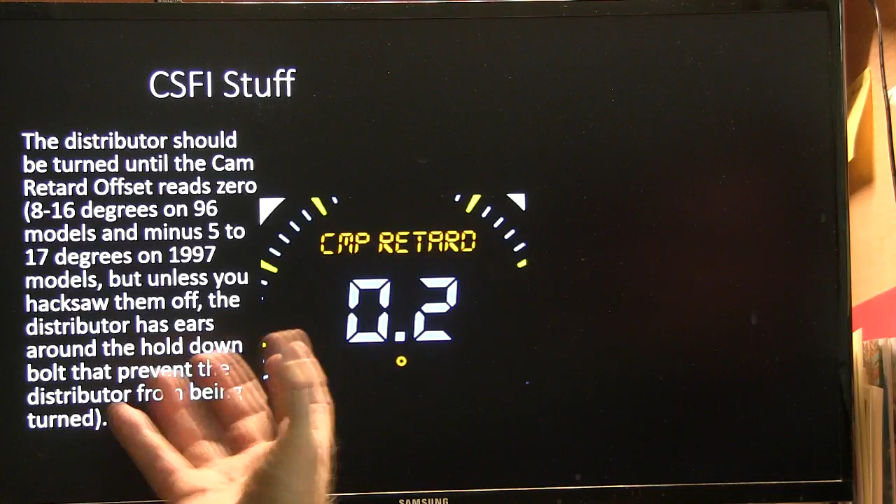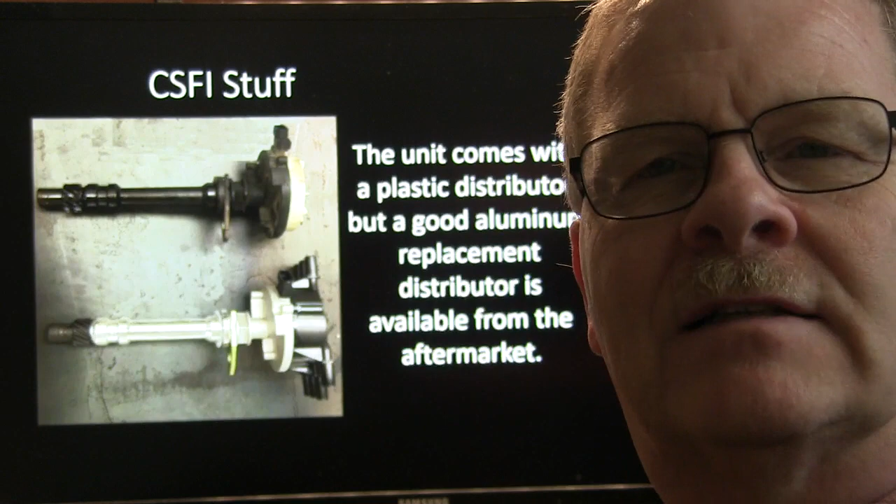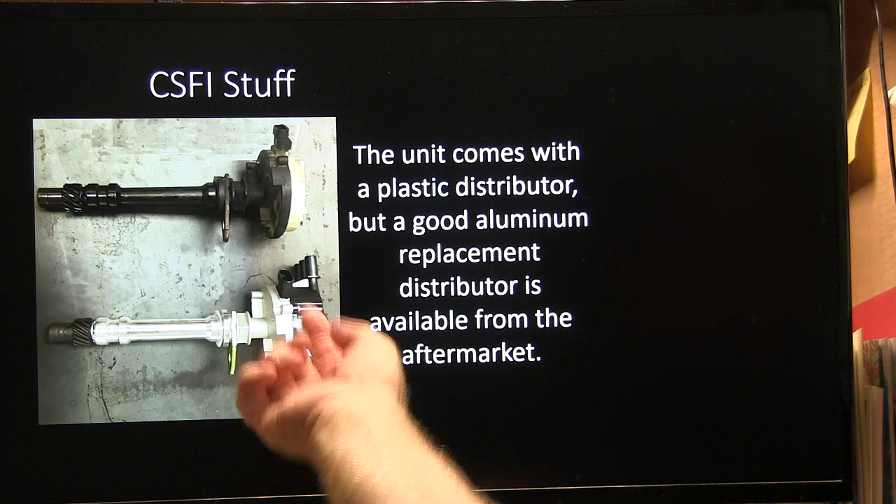Unless you hacksaw the ears off of the distributor so you can turn it, you may have issues with that. A lot of the times, the right way to go is to get rid of that ridiculous plastic distributor and put an aluminum one in there. Those plastic distributors I've always thought were kind of a joke anyway - I mean, they work, but the aluminum one they sell at the parts house to replace the plastic one is so much better. And also you might remember these - you've got to pay attention to where you're putting the plug wires onto these because of the way they're designed.

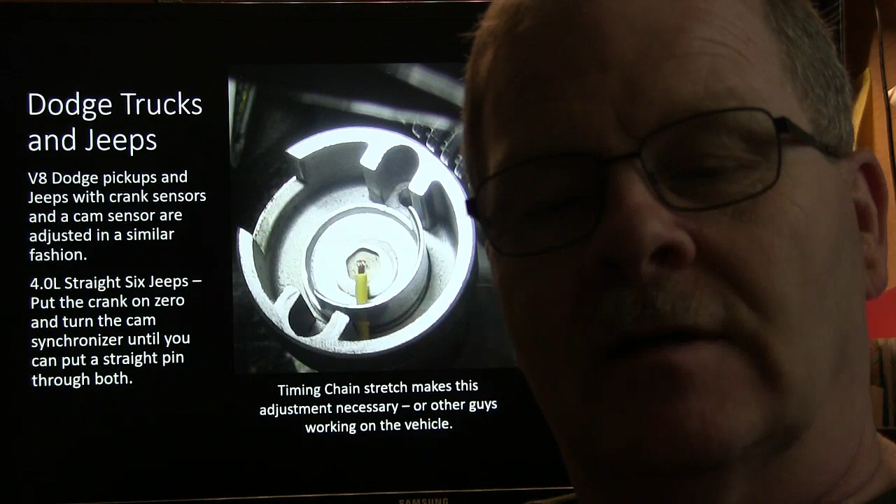All right, Dodge trucks and Jeeps. Now, Dodge trucks, a lot of them have a setting sort of like the cam retard offset on those, where you pull it up on a scan tool and you're supposed to dial it in. And this - you're not changing the timing when you turn the distributor on these, okay? Just be aware of that. I'll talk about that a little bit more in just a minute. But whenever you turn the distributor on the one that's got a cam sensor in it, all you're doing is changing rotor alignment, and you're also changing the relationship between the cam sensor.

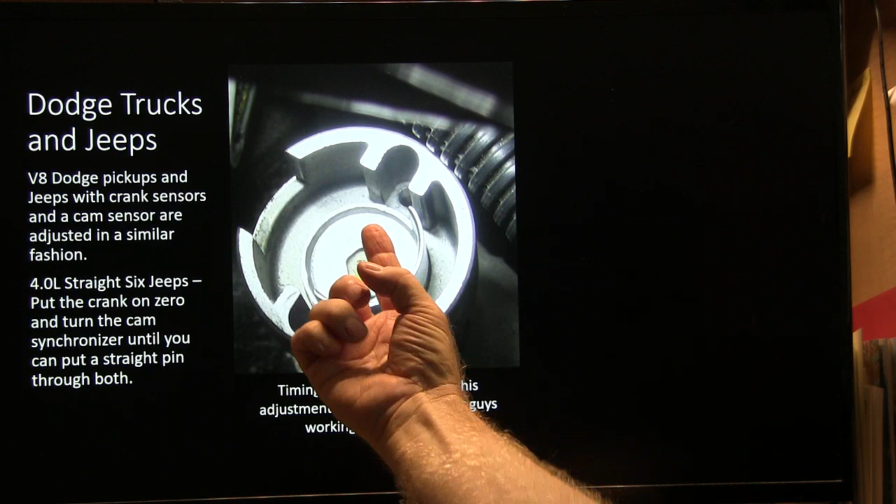You're going to get a different signal going to your computer on that. I used a piece of wire here, but on the Jeeps, you put it on top dead center compression 0. You turn this around to where it's lined up, where you can go through the hole in the side of this housing and through that. You can line that up. That's a 4-liter straight 6 Jeep.

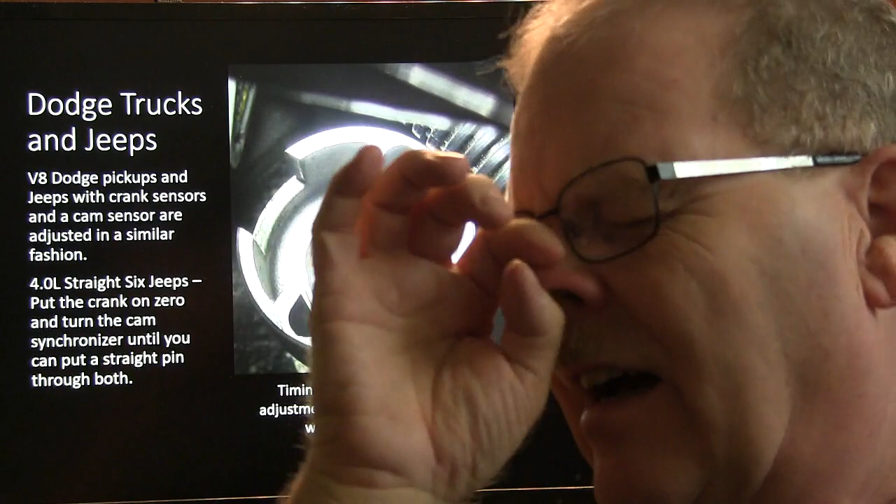On the Dodge, you use a scan tool and you adjust it. I think it's to 5 degrees. Don't quote me on that, you may have to look that up. But you use a scan tool to set it on those too.

Typically, if it has a crank sensor, you don't turn the distributor to adjust the ignition timing, except, I think I mentioned this later, in a 2001 and that vintage Xterra, they have a crank sensor, but the only thing that crank sensor does is give information so it can check for misfires. It does not provide ignition timing—you can unplug the crank sensor on an old Xterra like that and it still runs, because everything it needs for the ignition is in the distributor. And you also have to adjust the timing on one of those, even though it has a crank sensor. Just about everything else doesn't.

Now, the V8 engines like these have on them, when you put that crank sensor in there, you don't just slide it down in there and bolt it up. It's got a slot that's adjustable. You can buy these spacers from an aftermarket supplier—I bought a box of them, can't remember who makes them, but anyway maybe Standard Ignition or something. You stick a spacer on the bottom of that crank sensor, a little cardboard spacer, slide it down so it's touching the crank wheel on a tooth there, and then you tighten it up. That sets the gap. If you don't put that thing in there with the right gap, it won't run right—found that out the hard way. But when that gap is right, that thing will run really smooth. When you're putting the crank sensor in, if you get a new one, it'll come with that little spacer on it. It snaps off when you start it, and then the gap is set right.

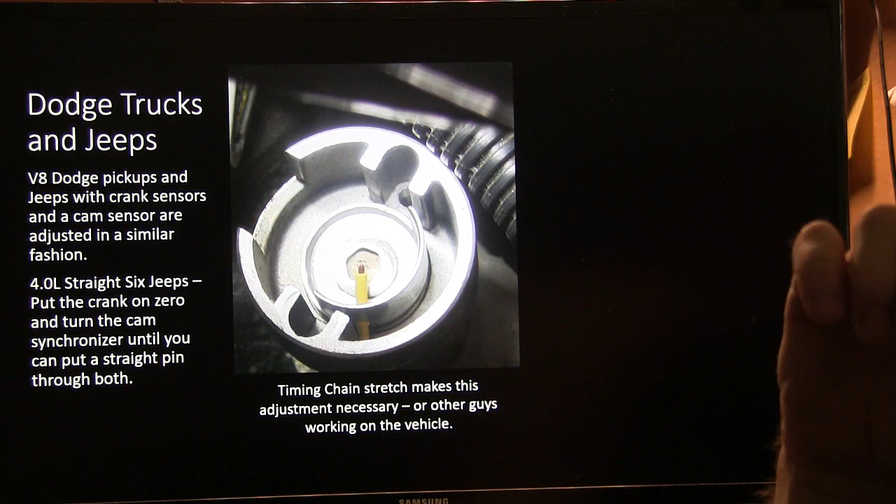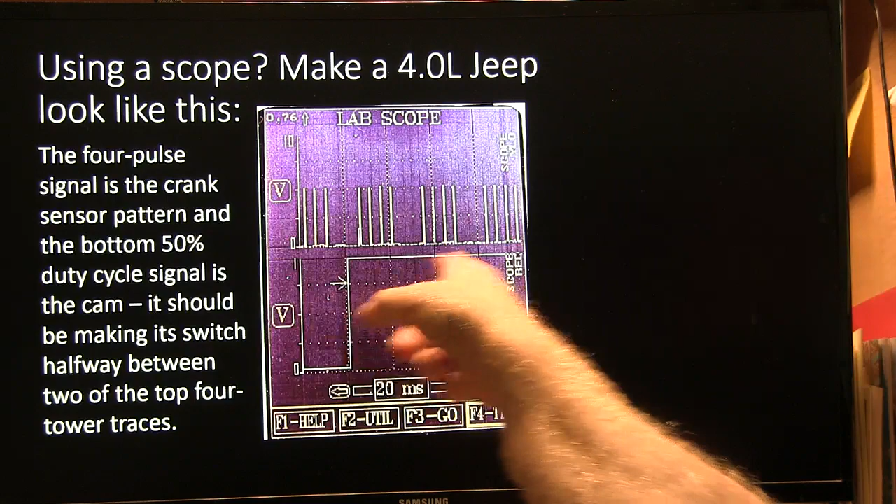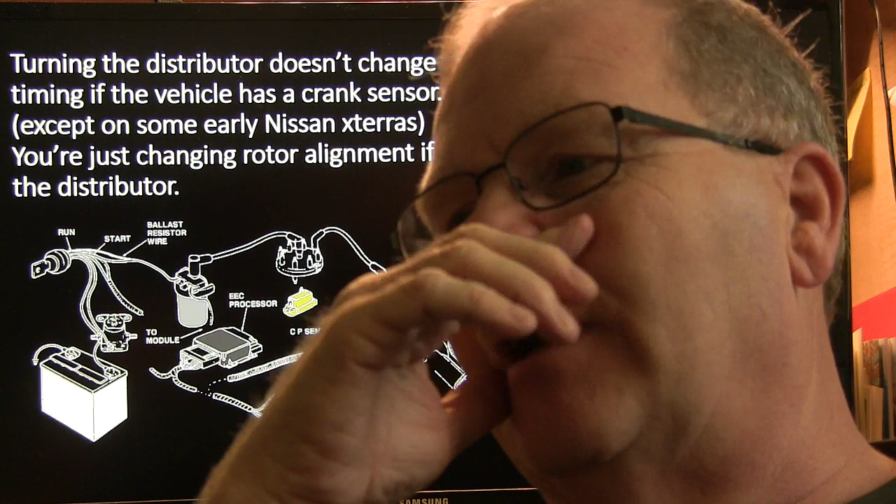And all right, turning the distributor doesn't change the timing if it has a crank sensor. First time I ever ran into this was in 1983 when I was working on an old EEC 3 Ford that had a crank sensor with those 4 spikes on the balancer, and that crank sensor going down there. It had a blue wire and a gray wire going down to it, and you had to set the rotor alignment on those with a special little tool. Somebody that's worked on those might know what I'm talking about there.

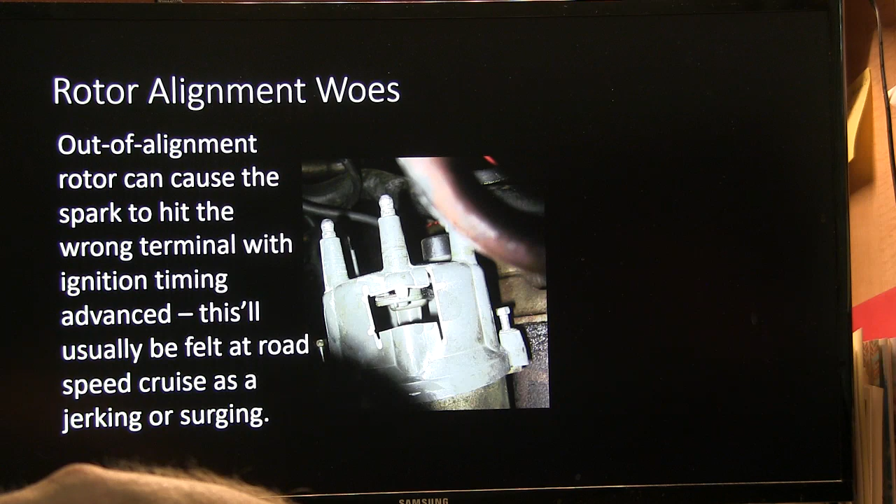On your out-of-alignment rotor, if that's pointing too far one way or another, whenever the timing advances to 50 degrees when you're cruising, it'll jump and hit the different post, and you'll feel it as a surge at road speed, okay? Really important.

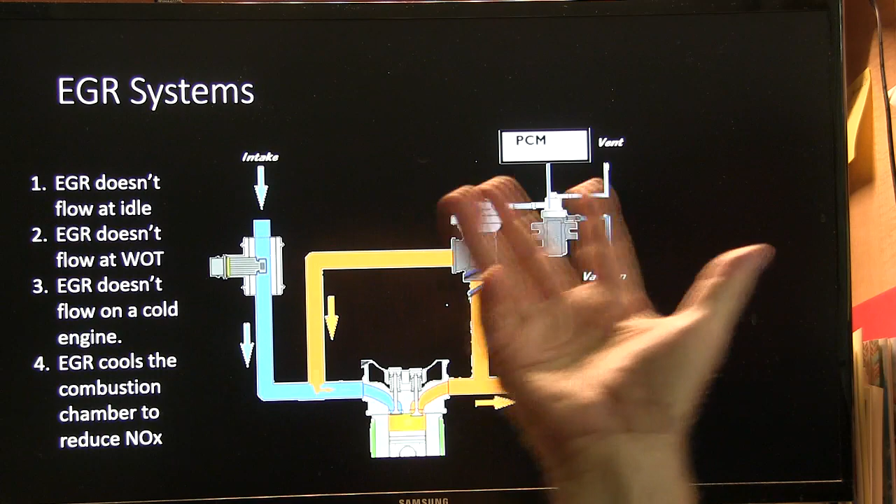All right, quick test: what's EGR and why is it necessary? Well, EGR doesn't flow at idle, doesn't flow at wide open throttle, doesn't flow on a cold engine—it cools the combustion chamber to reduce NOx. On some of your diesels that have EGR, if you open the EGR when it's idling, it quiets it down.

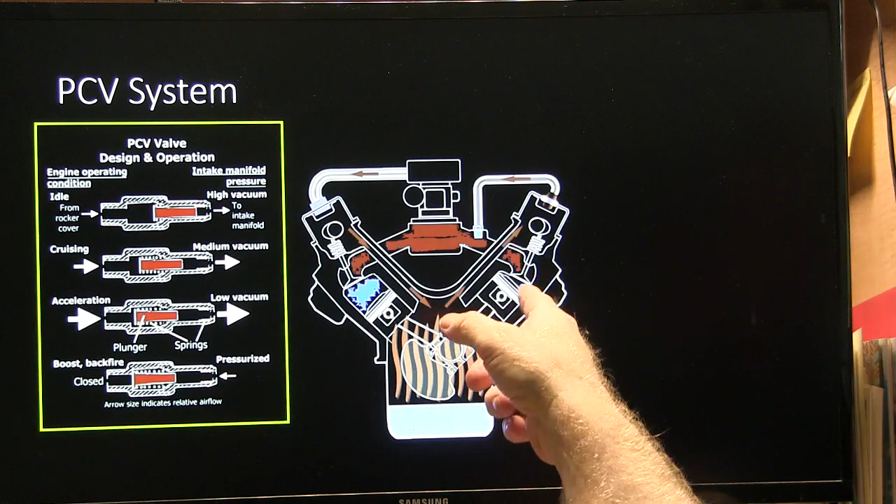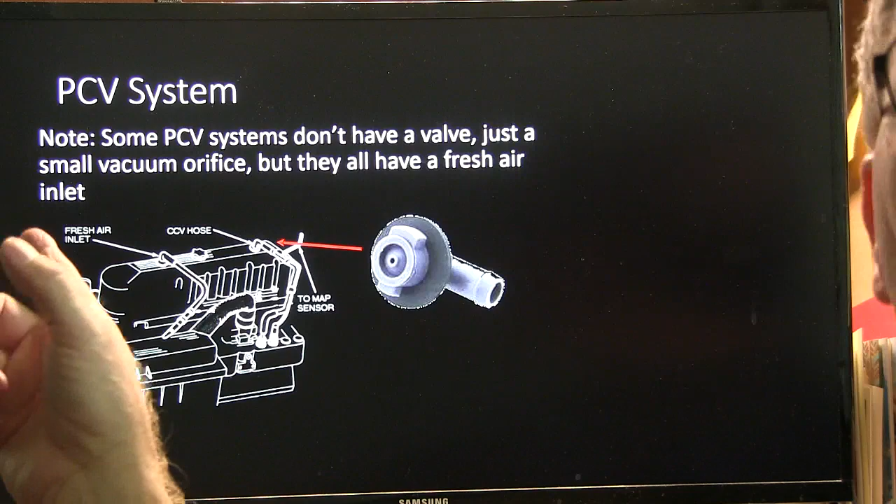All right, what's PCV and why is it necessary? You see how the valve works there—pause the slide if you want to. It's basically purging the vapors out of the crankcase that are blow-by from the pistons. Right, there it is. All right, some PCV systems don't have a valve, they just basically have a little orifice back there, like on this 4-liter Jeep.